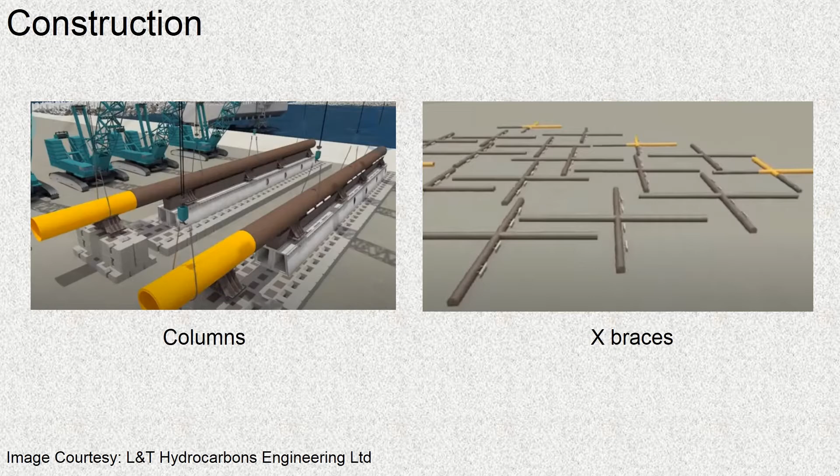Having fabricated the columns and the bracings separately, we bring them to an assembly point wherein these bracings are welded onto the columns at marked locations. There will be some marked locations wherein it is force fit and then welded. These points act as points of very high stress concentration and have to be designed and welded very carefully. There are also a number of temporary leg pods which assist the placement of the columns and bracings according to the geometry.

Once we keep these vertical bracings, we can box this section. You can also see a number of pile guides being placed. Similarly, the remaining columns and bracings are integrated at a separate location and brought to the final assembly, assisted again by the leg pods we had seen previously. So they're all boxed up together to form one single platform.

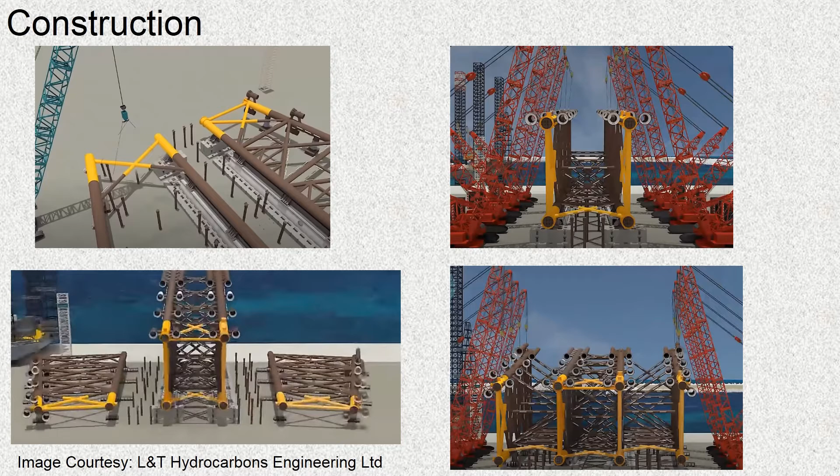Before we load out the jacket platform onto a barge, a mud mat is provided beneath it. This mud mat acts as a temporary support and provides stability to the platform when placed on the seabed. Because when we just place the platform on the seabed, there are no piles to support it from environmental loads, these mud mats provide temporary support against any sliding or overturning moment.

At this instant, we do not have much effect of the wind because we are not keeping the superstructure on top of the platform. It is just the jacket alone.

Also, buoyancy tanks have to be placed. The jacket by itself would have some amount of buoyancy, but would it be enough for the installation requirements? Depending upon the designer, an additional buoyancy tank may be suggested so that we get the required buoyancy, so the whole jacket remains floating for the final installation procedure of upending.

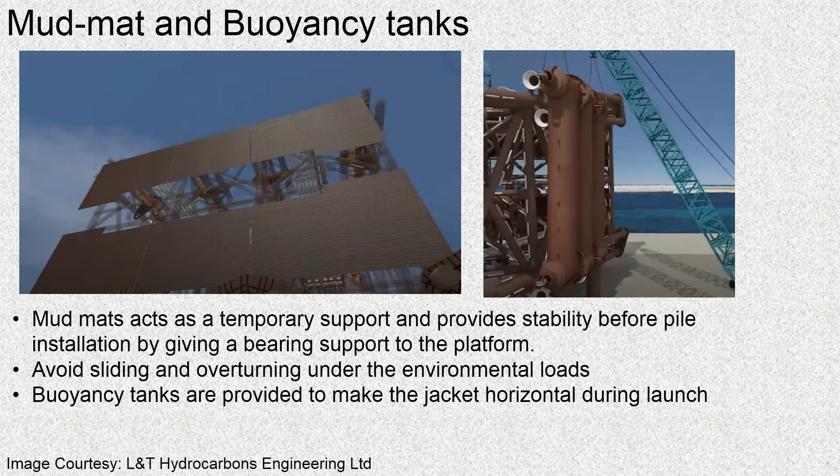The fabrication of the jacket is completed in the yard. We'll look at the sequence of installation of the jacket. The first process carried out is the loadout, which refers to the transfer of the jacket from the yard to the floating barge. This can be done using any suitable mechanism.

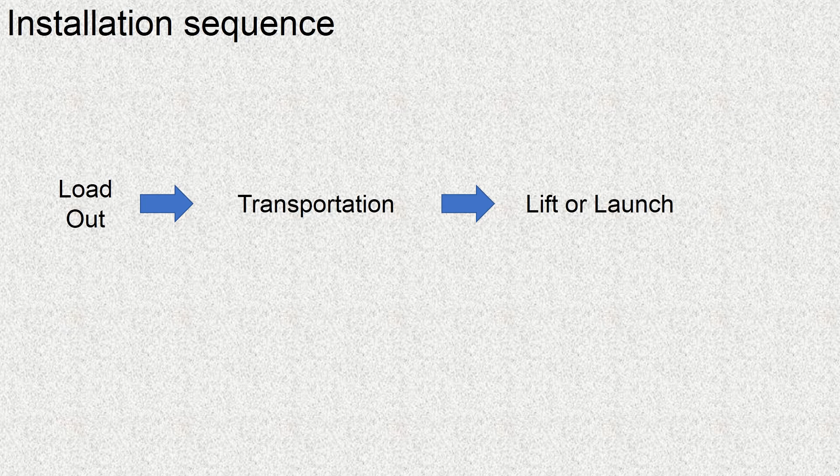Once on the floating barge, the jacket is taken to the region of interest using tugboats. Once we reach the marked location where we are supposed to install the jacket, it is launched from the barge to the seawater. In this process, the jacket is actually horizontal.

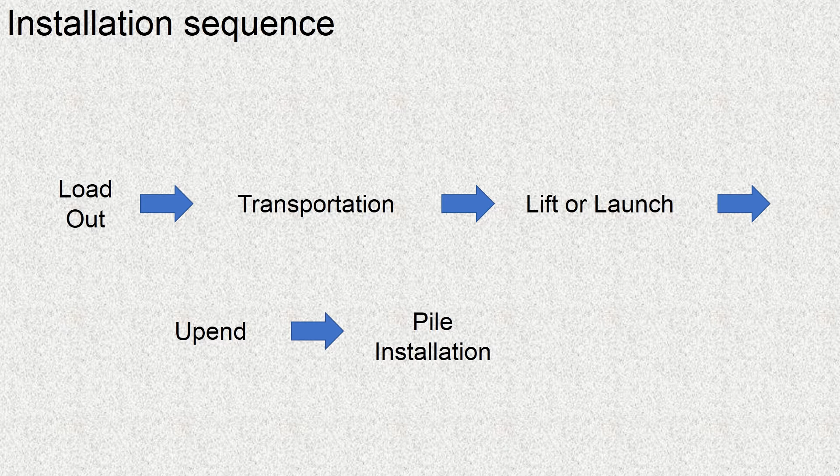This horizontal jacket is turned to an upright position, the final service condition of the jacket, using a crane. This is followed by the pile installation. Between the upending and the pile installation, the mud mats support the jacket from overturning and sliding, and finally the superstructure installation takes place.

This is a floating barge, a flat bottom barge. These are the type of barges specially used for this jacket installation or loadout process. There are rails on which the jacket needs to be brought in. There are several mechanisms to do this, such as a pivot pulley arrangement or using trailers.

These rails are generally lubricated to reduce friction. Only the substructure, this jacket, is brought into location by barge. The superstructure is generally brought by crane, because you don't want the superstructure to be launched in water, as these are very critical equipments directly brought using a crane.

There are several other types of superstructure installation we'll see later. One more crucial point is that this is a pivot element. It can be rotated, which would facilitate the launch of the jacket onto the seawater.

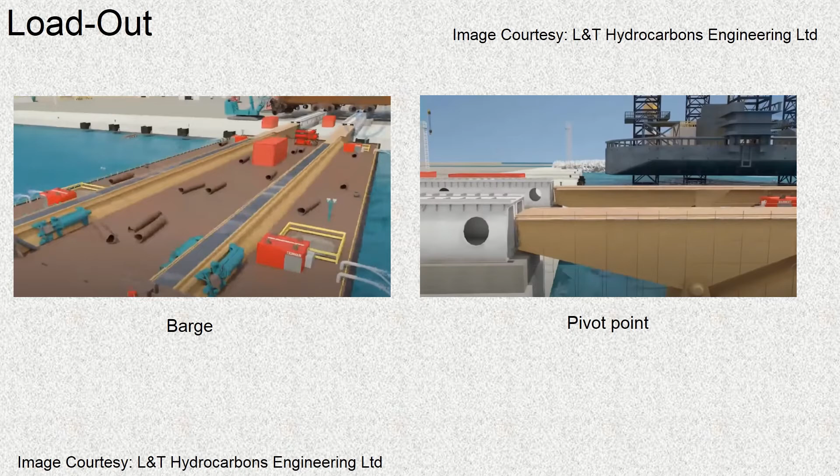This is the pivot and pulley arrangement I was talking about. There is a stroke motion in this direction which facilitates the movement of the jacket platform towards the barge. Once the jacket is placed on the barge, there are support structures along the rails which are welded and attached so that the jacket does not slip off during transport, and several tugboats are attached ready for transportation.

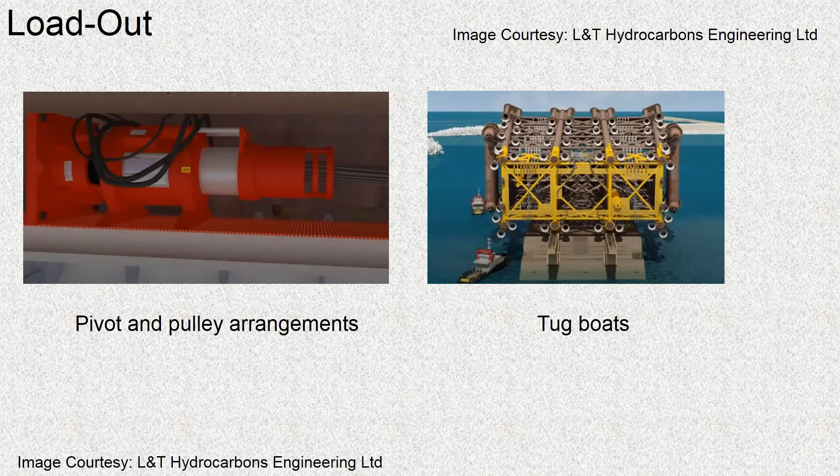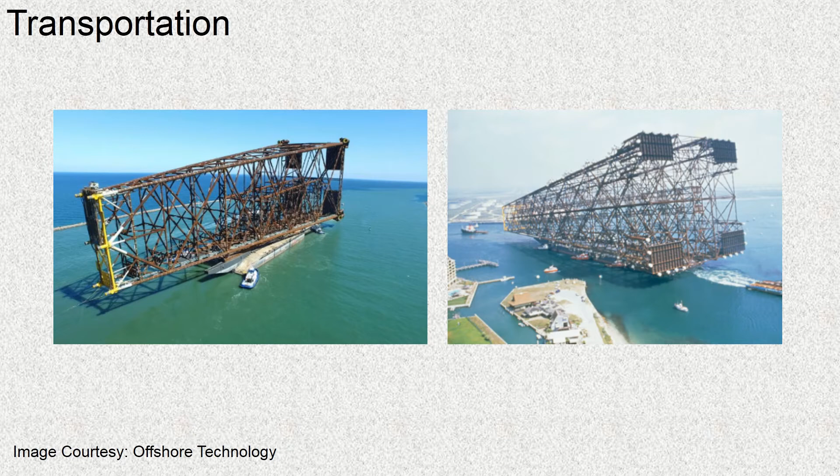These images show the launch process of the jacket onto the seawater. Once the barge is brought near the region of interest, a certain portion is ballasted with water so that we obtain a small inclination, generally 3 degrees depending upon the coefficient of friction. The jacket may then slide onto the seawater, or in some cases winches or hydraulic jacks are used to assist this process.

The barges used for this launch purpose are divided into a number of compartments, which can be flooded with water so that we obtain an angular arrangement allowing the launch to be carried out. The jacket begins to slide, and then through the pivot point it falls into the seawater. Here comes the crucial effect of the pivot point.

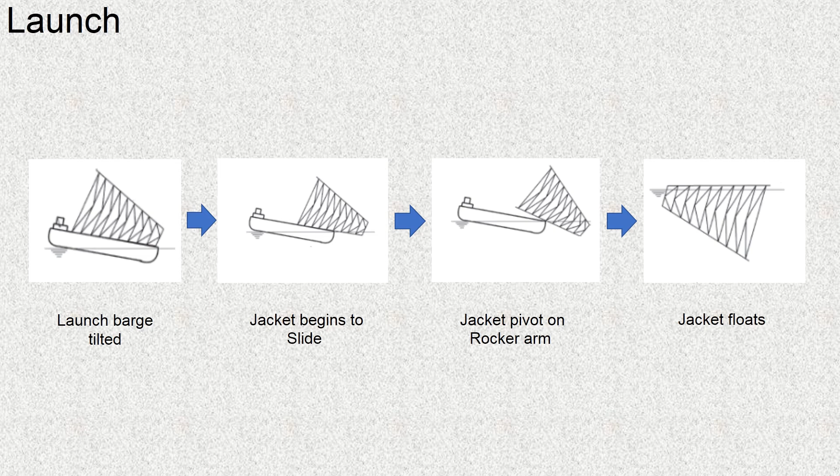This is the rocker arm here that we were discussing, which would facilitate the movement of the jacket onto the seawater. This is the barge, and the compartments towards the side of the rocker arm need to be ballasted with water so that we get a 3-degree inclination and the jacket smoothly slides onto the seawater. The railings were also previously lubricated to reduce the coefficient of friction, but in some cases even winches or hydraulic jacks may be used to assist this process.

It should be taken care that the barge is not ballasted to a great degree of angle, because with this very huge mass being at one corner, there is a chance that the barge might get toppled and there could be an accident.

One more interesting thing to note is that once the jacket is being launched into water, it should be taken care by the designers that the jacket does not crash onto the sea floor. So we attach buoyancy tanks so that there is sufficient buoyancy and the jacket can come up. Approximately 5 to 10 meters is given as tolerance with the seabed, so that any crash can be avoided in shallow waters.

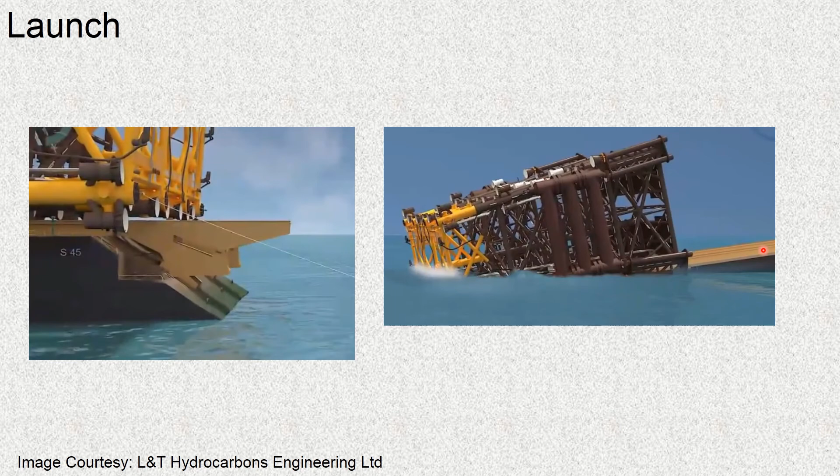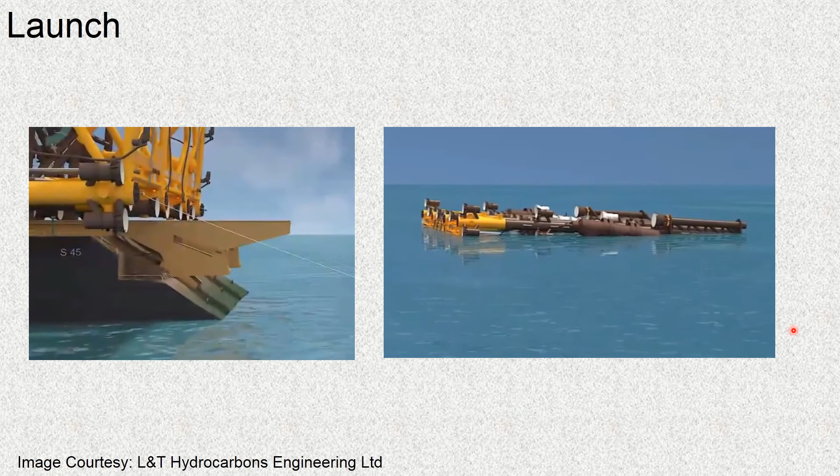Now once the jacket is released into the seawater, it remains in horizontal orientation with the help of the buoyancy tanks. This is because the slings that are kept for the next process, that is the upending process, are in this location, and in order to have access to that, we need the platform to be in a horizontal position.

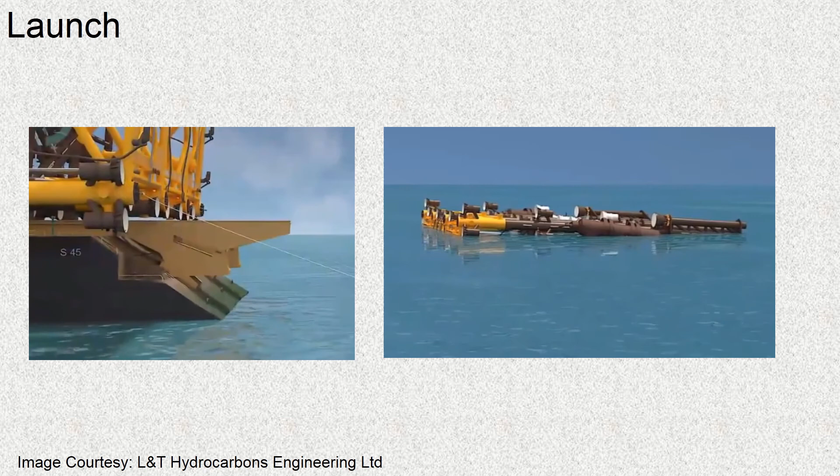Now this is the upending process, wherein the horizontal jacket that was in the seawater previously is brought to a vertical position using a crane. You can imagine what the lifting capability of the crane should be, because this jacket is a very heavy structure - almost as big as a very tall building, with a very high weight in terms of tons. The advantage of cranes used for offshore installations is that they do not require counterweight in terms of mass like what is seen in land-based cranes.

Instead, like what we had seen for the barge being ballasted, a similar counterweight is obtained by ballasting the chambers in the crane, which would act as a counterweight. Ballasting is the process of filling water into the chambers.

Subsequently, from the barge, using the flooding lines, the ballast chambers that we had added on the sides for additional buoyancy are filled in with water. During this process, there is a change in the center of gravity and the center of buoyancy of this jacket, and this manipulation is termed the upending process.

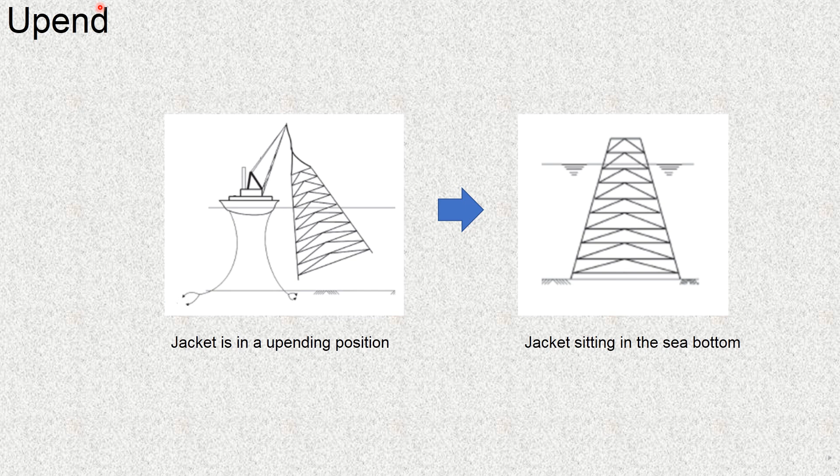The image to the left shows the jacket being upended using a crane, and these are the slings attached to the jacket. As we slowly move the jacket to a vertical position, the buoyancy chambers are slowly flooded with water, and a remotely operated vehicle turns the valves of the buoyancy chambers, bringing it to a vertical position.

Further filling of the buoyancy chambers results in the complete movement of the platform towards the seabed, and the target location is achieved by the use of GPS as well as gyros.